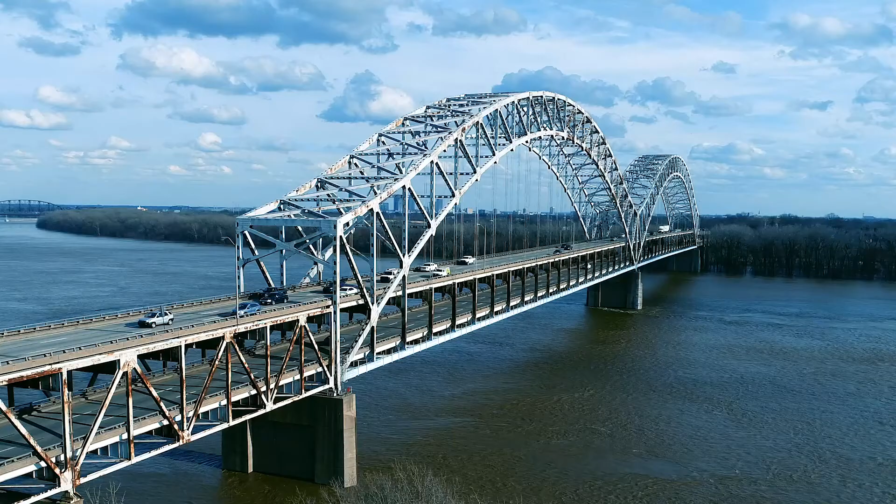The following presentation provides an overview of the Sherman-Minton Renewal project, including the environmental document and Preferred Alternative Maintenance of Traffic, or MOT, approach for construction.

In this presentation, you will learn about the project overview and status, public involvement overview, purpose and need and range of alternatives considered, alternatives analysis, the Preferred Alternative MOT and contract requirements, and public comment guidance.

The goals of this presentation are to provide an overview of the project and the environmental document, present the Preferred Alternative MOT, and obtain public input on the environmental document and the Preferred Alternative MOT.

The Sherman-Minton Renewal involves a rehabilitation of the I-64 Sherman-Minton Bridge and the associated Indiana and Kentucky approach bridges. The project is a design-build best value procurement, which means price is not the only criteria that will determine which team is selected. This project delivery method invites innovative traffic management and constructability solutions that will help reduce construction time and impacts to the public.

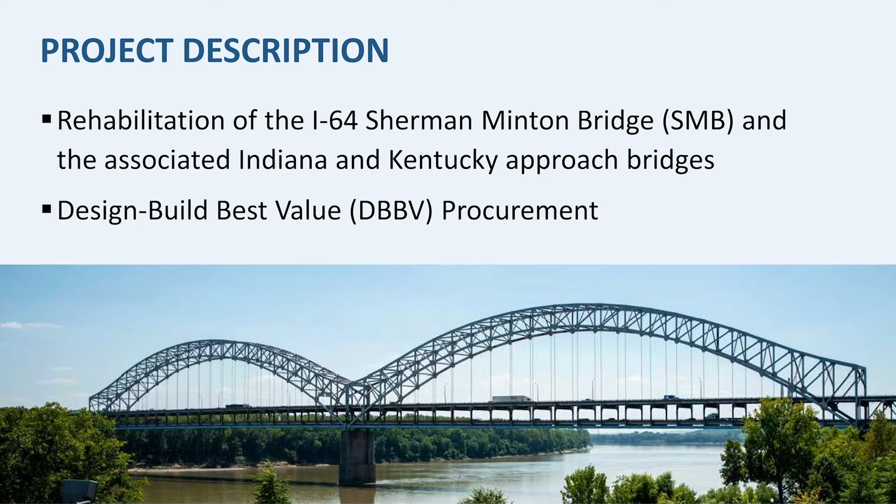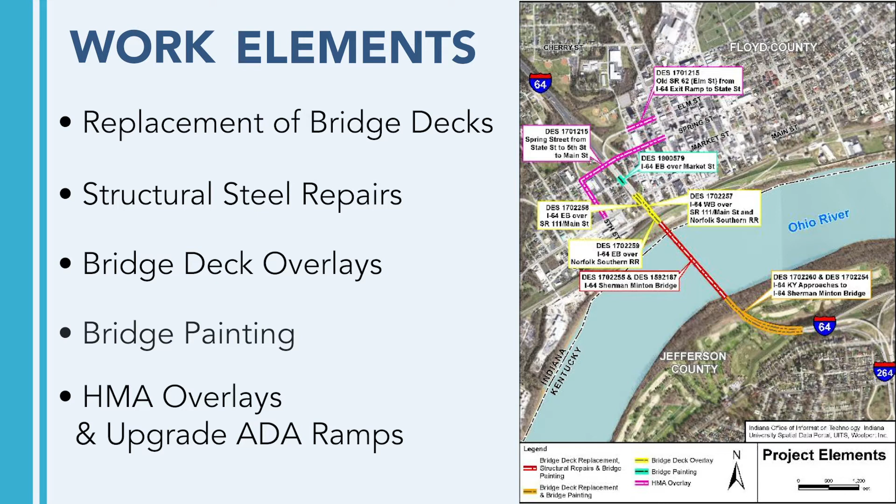Work elements include replacement of bridge decks, structural steel repairs, bridge deck overlays, bridge painting, hot mix asphalt overlays, and the upgrading of ramps in accordance with the Americans with Disabilities Act.

The draft environmental document required by the National Environmental Policy Act is available for public review and comment starting July 1st, 2020. Public outreach and an official comment period will take place from July 1st until August 14th, 2020.

The request for proposals, or RFP, was issued to the 3 shortlisted proposers mid-June, and the selection of the design-build contractor team will take place in the winter of 2020. The estimated 3-year construction process is scheduled to start in 2021.

As part of the environmental study, the project team has conducted an extensive public involvement process following the launch of the project in August 2018. Through a wide range of outreach tools and conversations, the project team has received valuable input from community leaders, elected officials, business owners, and the general public.

Public outreach has included setting up a project website, establishing advisory committees, developing social media channels, and administering surveys. The project team has conducted 4 open houses, 4 community advisory committee meetings, and 4 environmental justice committee meetings.

To date, there has been significant engagement with the public to include more than 38,000 engagements on social media, more than 6,200 visits to the project website, more than 2,700 people completed project surveys, and 170 people completed comment cards.

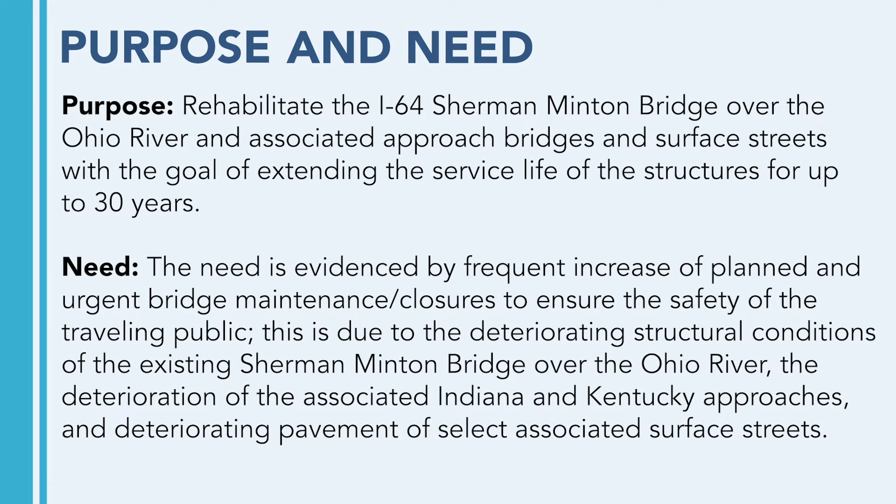The need is evidenced by an increase of planned and urgent bridge maintenance and closures to ensure the safety of the traveling public. This is due to deteriorating structural conditions of the existing Sherman-Minton Bridge over the Ohio River, the deterioration of the associated Indiana and Kentucky approaches, and deteriorating pavement of select associated surface streets.

As part of the environmental study, the alternatives considered include no-build and build, or rehabilitation. The no-build alternative is an avoidance alternative. In other words, there is no immediate spending of funds, no impact, and this requires more frequent inspections, maintenance work, and potential closures. It increases user costs and does not meet the purpose and need of the project.

The build or rehabilitation alternative involves the following: repair of the existing bridge structure, use of federal funds, temporary traffic and environmental impacts, a reduction in maintenance and potential closures, extension of functional life, and all work is completed within the existing right-of-way, and it meets the purpose and need of this project.

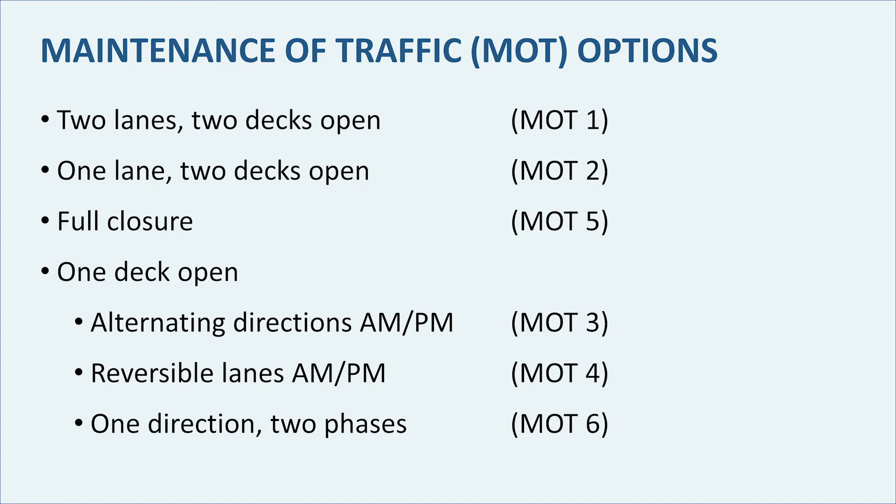6 MOT options were initially evaluated following an extensive traffic modeling process: 2 lanes 2 decks open, 1 lane 2 decks open, and 3 different variations of 1 deck open, including alternating directions in the AM and PM, reversible lanes in the AM and PM, 1 direction in 2 different phases, and full closure. The following graphics illustrate each of the MOT options, noting the estimated duration of construction as well as access and closure details.

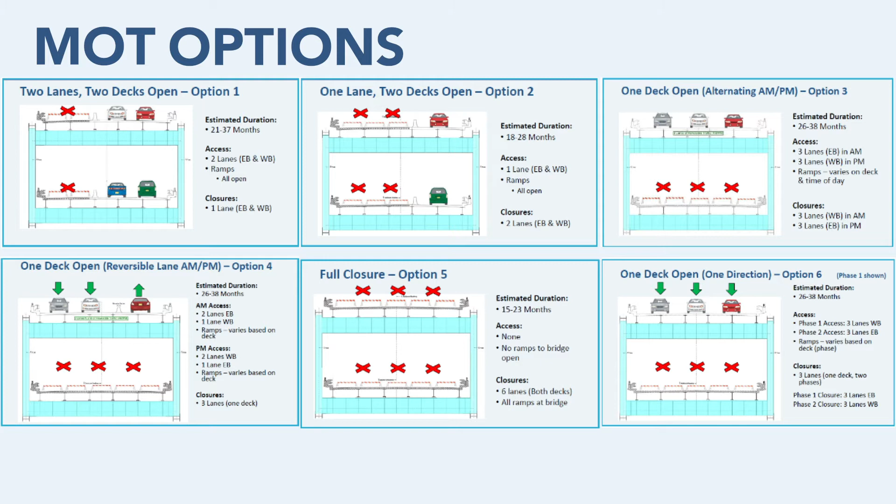Key project constraints include rehabilitation of existing structures, no additional capacity, staying within existing right-of-way, limited excavation associated with ADA ramp upgrades, and temporary ramp widening during construction.

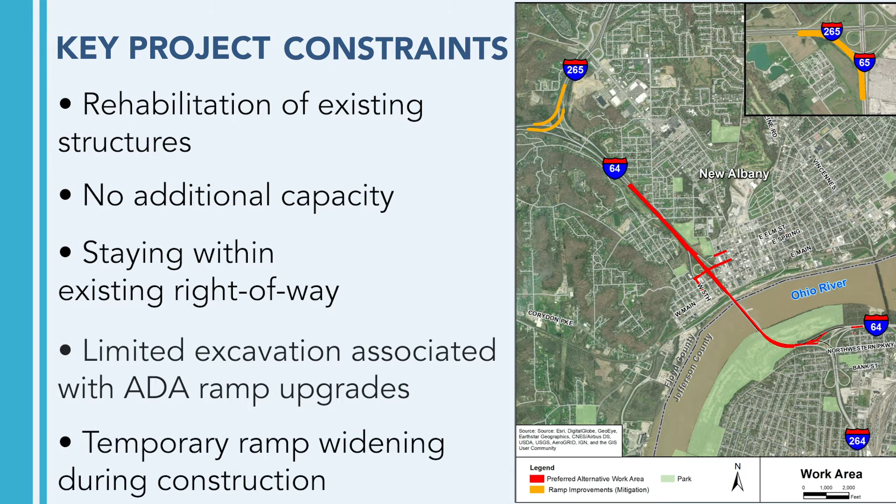Contractors are limited to working within the existing right-of-way. There are no direct impacts to natural resources, such as wetlands and streams, cultural resources, such as historic properties, or social resources, such as parks and trails, and tree clearing and excavation will be limited.

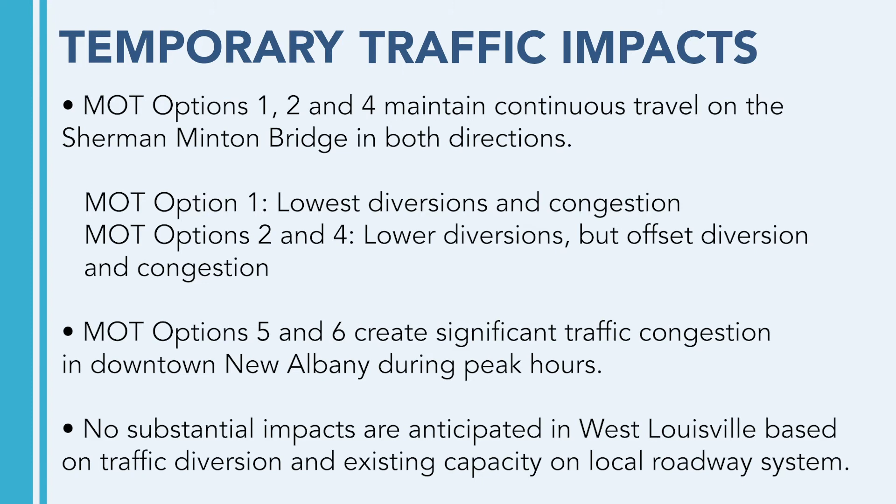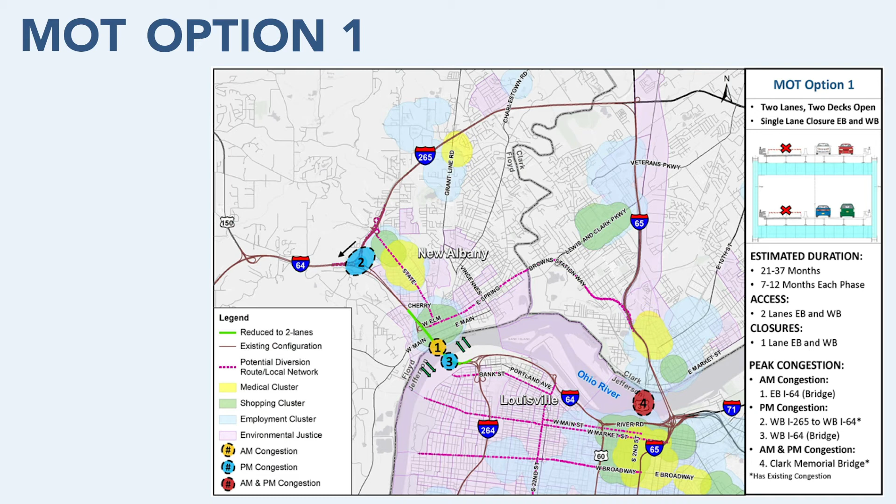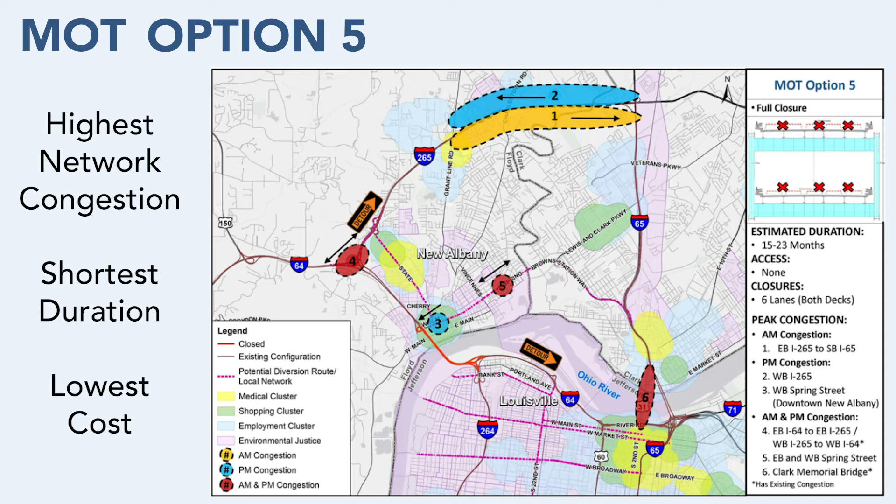With these options, no substantial impacts are anticipated in West Louisville based on traffic diversion and existing capacity on local roadways. This slide and the following slide illustrate both ends of the spectrum. MOT option 1 shows the lowest network congestion but the longest construction duration and highest cost. In contrast, MOT option 5, or full closure, shows the highest network congestion but the shortest duration and lowest cost.

When considering temporary transit impacts, the following conclusions were reached. The temporary impacts and potential detours experienced by transit users would vary by MOT option. Due to the fixed route nature of transit, there's greater emphasis on reliability and on-time performance. MOT options 1, 2, and 4 maintain continuous travel on the Sherman-Minton Bridge in both directions and would be less disruptive. MOT option 5, or full closure, would require rerouting of the TARC Route 71. Conversations with TARC leaders tell us that TARC has the flexibility to accommodate changes and minimize impacts to service.

When considering temporary economic impacts, the following conclusions were reached. Local businesses closest to the Sherman-Minton Bridge that rely heavily on cross-river patronage will be most affected. The temporary impacts vary by MOT option. MOT option 1 results in the lowest economic impact and the longest duration. MOT options 2 and 4 result in continuous two-way travel lanes across the bridge, but offset diversion and congestion. MOT option 5, or full closure, results in a disruption of cross-river commerce and a higher economic impact.

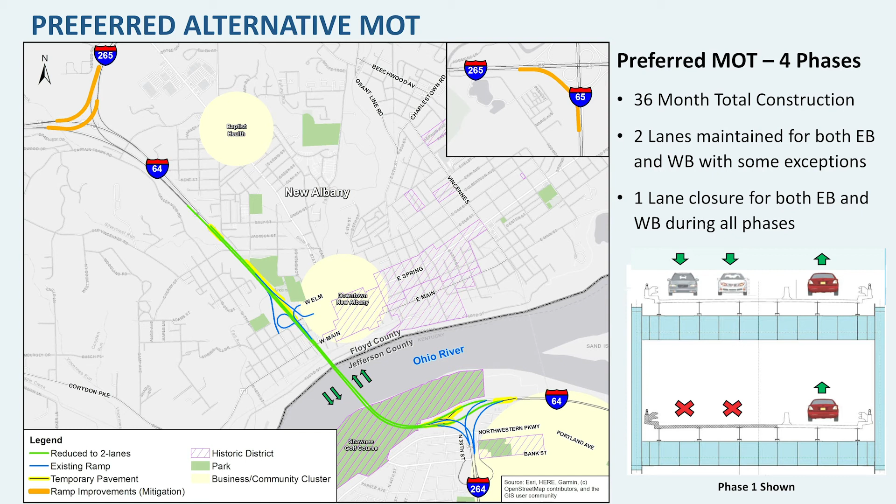The preferred alternative will take place in 4 phases, and features include cross-river traffic being maintained with 2 eastbound and 2 westbound travel lanes open during the majority of construction, existing access ramps remaining open during the majority of construction, temporary crossover lanes and widening to ramp lanes in place to facilitate traffic flow, and 1 eastbound and 1 westbound lane closed throughout construction. 2 lanes will be maintained in both directions with access to all ramps at all times, with the following exceptions.

Traffic may be reduced to 1 lane each direction overnight for up to 180 nights per calendar year. Associated ramps may also be closed at this time. 9 consecutive days and up to 3 weekends of full closure in each direction may occur no more than once per calendar year. Associated ramps will be closed at the same time.

The design-build contractor will be allowed to work 24 hours per day, 7 days per week. However, changes in traffic patterns and full closures will not be allowed during certain holidays and other approved exceptions.

Detour routes for Kentucky and Indiana will be in place during full closure. These routes will be posted along the interstate system to alternate interstate river crossings. State Street in New Albany may be used as an alternate during overnight ramp closures.

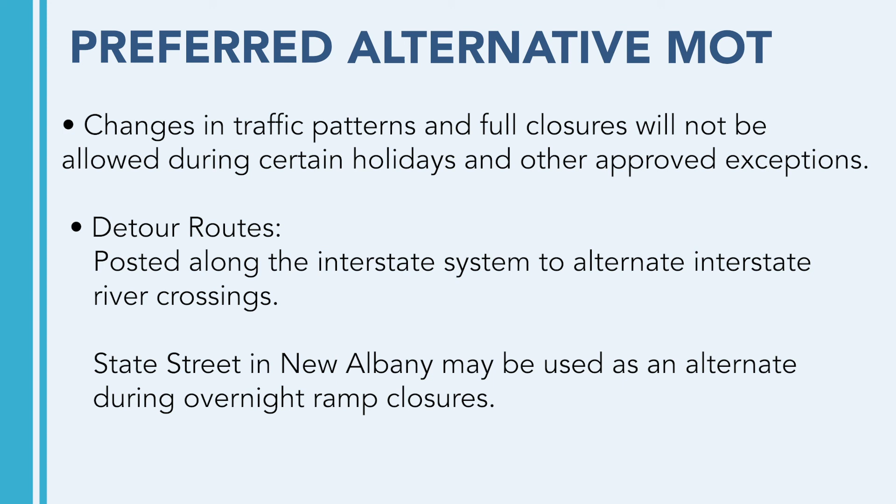The preferred alternative for MOT avoids or minimizes overall traffic impacts and diversions, economic and social impacts, and impacts to transit service. Construction is expected to take approximately 3 years. The project will not have a disproportionately high and adverse effect on environmental justice populations.

For public review and comments, the environmental document is posted on the project website. It is also available at several locations in Kentucky and Indiana, including the Indiana Department of Transportation's Seymour office, TARC headquarters, Shively City Hall, the NIA Center, and Hope Southern Indiana in New Albany.